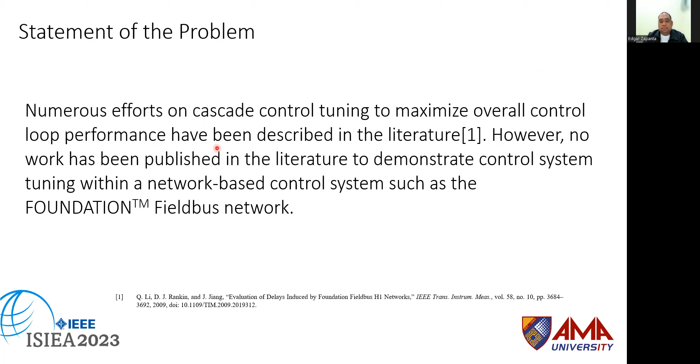So the objective of this study is to employ particle swarm optimization to improve the overall control loop performance, especially the cascade control implemented in Foundation Fieldbus system, and specifically in the control in the field approach, in which the control algorithm is implemented in the field devices.

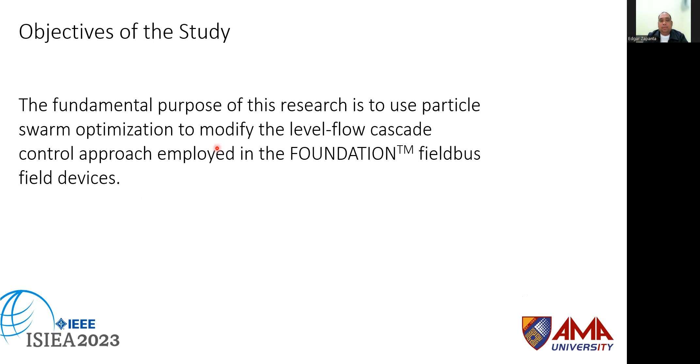So for our scope and limitations, the particle swarm optimization approach will be developed in MATLAB to optimize the controller gain values of the cascade control systems for both inner and outer loops, or our primary and secondary control loops. The obtained values will be subsequently used in the DeltaV distributed control system process skid simulator as our tuning parameters for the cascade control loop, which is our level and flow cascade control application.

And the tuning parameters obtained in the particle swarm optimization will be tested under step set point changes. And the performance of the control loop will be measured in terms of percent overshoot, percent undershoot, and settling time.

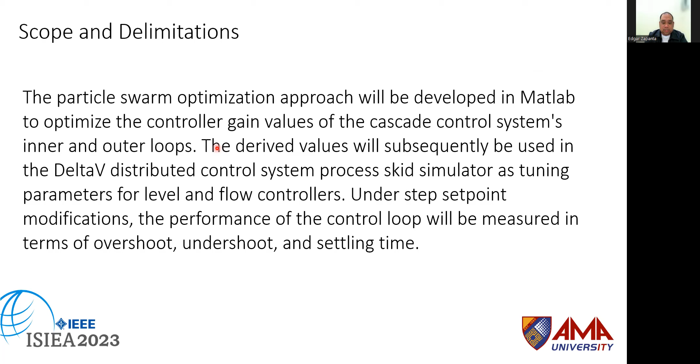So the importance of our study: this will remove the need for complex and time-consuming tuning processes for cascade control systems. Since cascade control systems involve two controllers, the two controllers need to be tuned individually and sequentially. Normally, we tune first the secondary control loop, followed by the primary control loop. So in this case, it consumes more time in controller tuning. Secondly, this will improve the control loop performance of the cascade control system, especially in Fieldbus network.

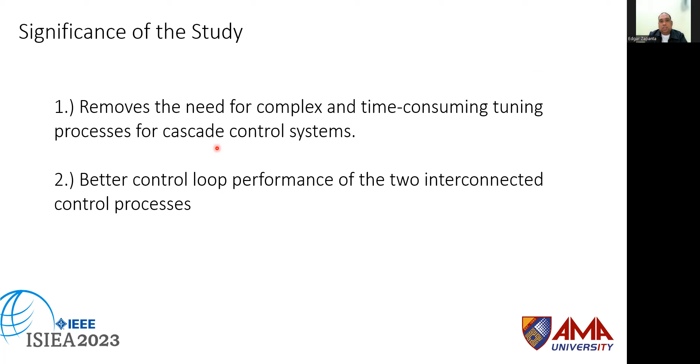Shown in this figure is a cascade control strategy implemented in DeltaV distributed control systems under the control in the field approach. Control in the field is basically the PID controller algorithm implemented in the field devices. Shown in the figure, this PID controller is the primary PID controller implemented in our level transmitter. And the secondary controller is implemented in the flow control valve positioner, the final control element.

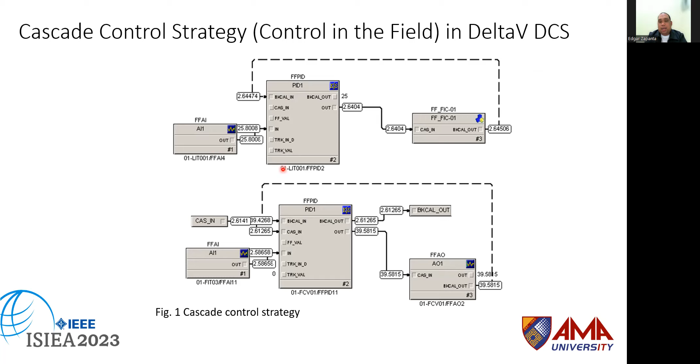So in this approach, control in the field improves the overall performance of the control systems. Despite this advantage, there are still communication delays induced in the network. So our study will try to resolve the problem of communication delays induced in the network by tuning both the primary and secondary controllers.

So for our methodology, Figure 2 shows our process simulator skid, where we conducted our studies. The field devices here are the differential pressure transmitter that measures the flow, the pressure transmitter to measure the level of the tank, and the flow control valve with positioner, which controls the inlet flow of the tank. All of these field devices are Foundation Fieldbus protocol. This system is a single input and single output system only.

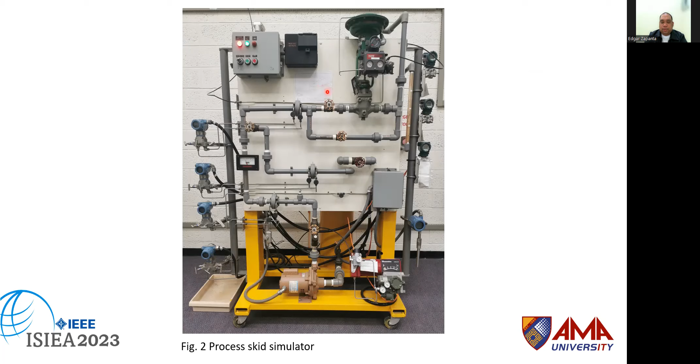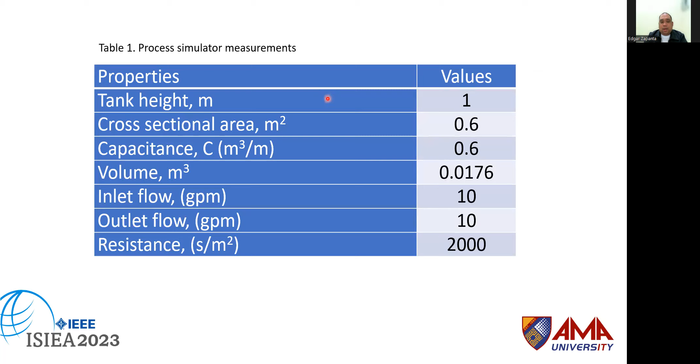Shown in table number 1 are the parameters of our simulator, such as the tank height, cross-sectional area of the control tank, the capacitance of the control tank, and the volume of the control tank. We have an inlet flow and outlet flow and the resistance of the level measurement. Using these parameters, we can model our system in the form of time constant as per the reference mentioned in this slide.

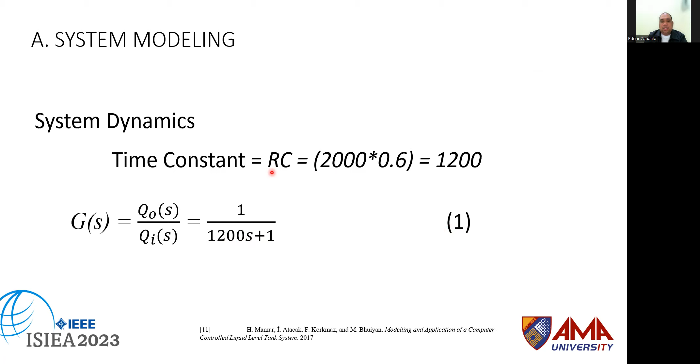So using the resistance and capacitance values in table number 1, the transfer function of the simulator is equal to the outlet flow over the inlet flow, which is equivalent to 1 over 1,200s plus 1, shown in equation number 1. The 1,200 is obtained by multiplying the resistance and the capacitance of the tank.

And the fitness function or objective function used in our particle swarm optimization is the integral absolute error shown in equation number 2. The objective of the particle swarm optimization is to minimize this fitness function, the integral absolute error.

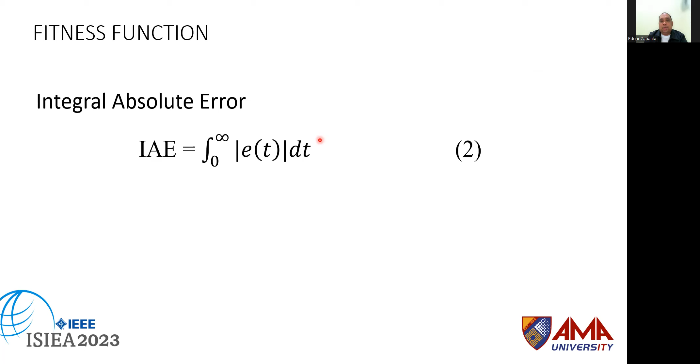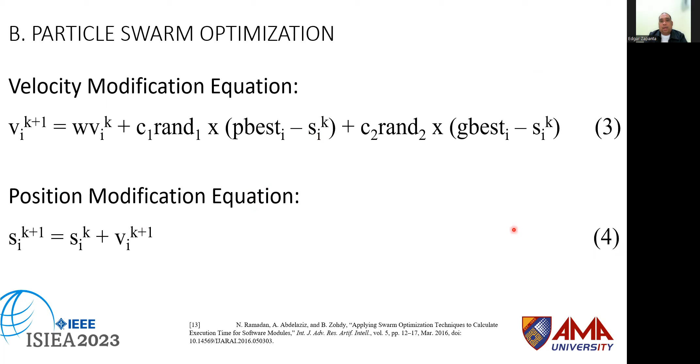Particle swarm optimization, as per this reference, involves 2 main mathematical equations: the velocity modification equation, shown in equation number 3, and the position modification equation, shown in equation number 4. This will be implemented in MATLAB to obtain optimum values of controller gains for both primary and secondary control loops simultaneously.

Shown in figure number 3 is the particle swarm optimization algorithm. Starting from the parameters of the PSO, such as the population size, the maximum number of iterations, C1, C2, and weights. C1 represents the personal acceleration coefficient, and C2 is the social acceleration coefficient.

After that, it will initialize the components, such as the controller gains, the position, and the velocity, and it will begin the first iteration and weight updates. Then it will evaluate our fitness function, the integral of absolute error. Then it will update the particles' positions and velocities. And then there will be checking of the number of iterations.

So if the algorithm did not reach the maximum number of iterations set in this process, the process will continue to update the best solutions and proceed to the next iterations and evaluate again the fitness function until the maximum iterations has been reached. And if the maximum iteration has been reached, then we can obtain the optimum values of controller gains for both primary and secondary control loops.

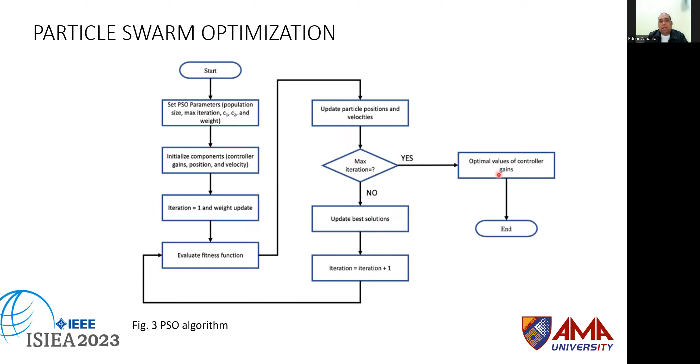So shown in table number 2 are the controller tuning parameters obtained from the PSO algorithm. So the KGP, KIP, and KDP represent the gain, the integral time, and the derivative time of the primary controller. So we have 0.4 gain, we have 10 seconds integral time, and no derivative time in the primary control loops.

Same in secondary control loops that represent the KGS, KIS, and KDS for the gain, for the integral time, and the derivative time of the secondary controllers. So the gain of the secondary controller, which is our flow, by the way, is obtained with the value of 0.8 and 20 seconds integral time and no derivative time.

In table 3 is the tuning parameters from conventional methods such as the Ziegler-Nichols method of closed loop tuning. So we have obtained the value of gain, the integral time, the derivative time of the primary control loop, which is our level control loop, which is equivalent to 0.15 gain, integral time of 20, and the derivative time of 5 seconds.

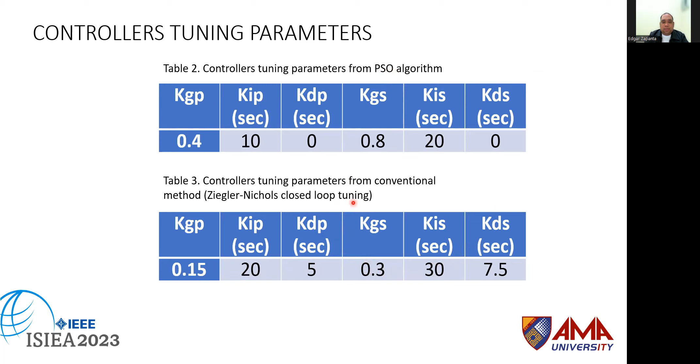So the flow control loop or the secondary control loop using the Ziegler-Nichols closed loop tuning, the gain is equal to 0.3, the integral time is 30, and the derivative time is 7.5 seconds. So these are the tuning parameters obtained from our proposed algorithm, PSO algorithm, versus the conventional method. So moving on to our simulation results.

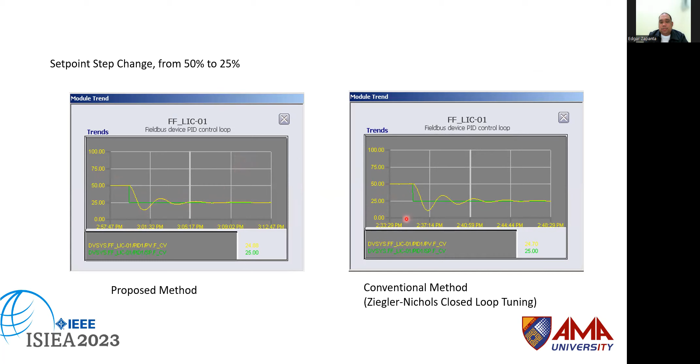So from 75%, we change back to 50%. Then, as you can see, our proposed method is still exhibiting a good control loop performance compared to conventional methods in terms of undershoot, overshoot, and settling time. Then finally, we tested from 50% to 25% level controller set points, and still the proposed method exhibits good control loop performance in terms of undershoot, overshoot, and settling time versus the conventional methods.

So tables 4 and 5 are the summary of our simulation results. So we tabulated the graph readings or the trends of our level indicating controllers. So table 4 represents the conventional method using the Ziegler-Nichols closed loop tuning method, and table 5 represents the proposed method, which is using the particle swarm optimization method.

So as you can see from table number 4 versus table number 5, which is our proposed method, the overshoot is much smaller compared to the conventional method. Same with the undershoot. The undershoot in the conventional method reaches very low readings compared to our proposed method. And finally, the settling time in the conventional method is much longer than the settling time in our proposed method.

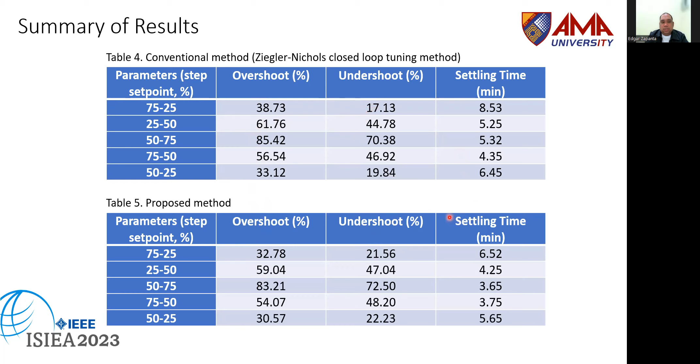So from these results, we come to the conclusion that the particle swarm optimization approach optimizes the controller tuning settings for both primary and secondary control loops, resulting in good control loop performance in terms of percent overshoot, undershoot, and process variable settling time.

The PSO algorithm outperforms the conventional Ziegler-Nichols closed loop tuning method in terms of computing speed for calculating the optimal controller tuning settings, since particle swarm optimization simultaneously tunes the primary and the secondary control loop, unlike the Ziegler-Nichols method, where we need to tune the controllers individually. So that's why using the particle swarm optimization algorithm reduces the computing time for calculating the optimal controller tuning parameters of the primary and the secondary control loops.